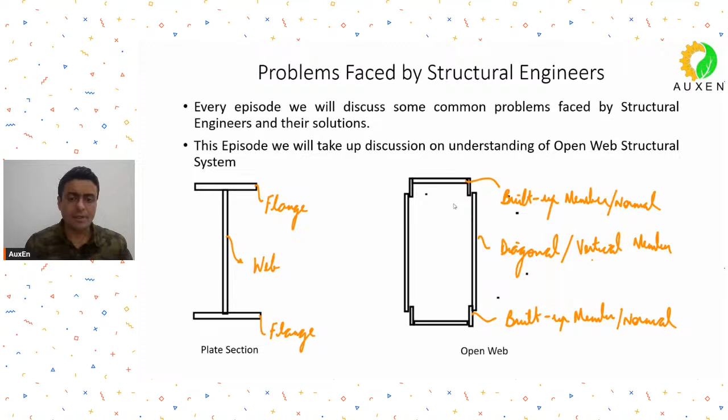Where have you seen this type of system? As I was telling you, in open web there is no well-defined web. So for example, in normal flexural plate sections, the flexural stresses are taken by the flanges and shear stresses are taken by the webs. But in open web, because there is no web, all the flexural stresses are taken by the top and bottom members in the form of a tension-compression couple, and the shear stresses are taken in the form of axial compression-tension by the diagonals or vertical members that we provide.

So we have shown a 3D isometric view of an open web member. It's nothing but a truss-like system. Generally for roofing systems we call it a truss, roof truss, but this type of arrangement we generally call the open web. It is similar to a truss kind of system.

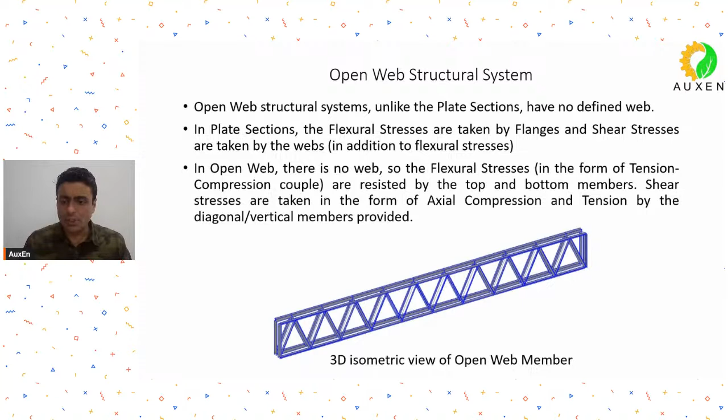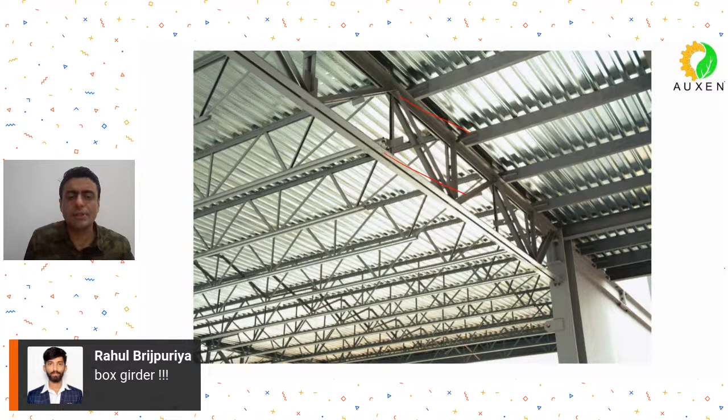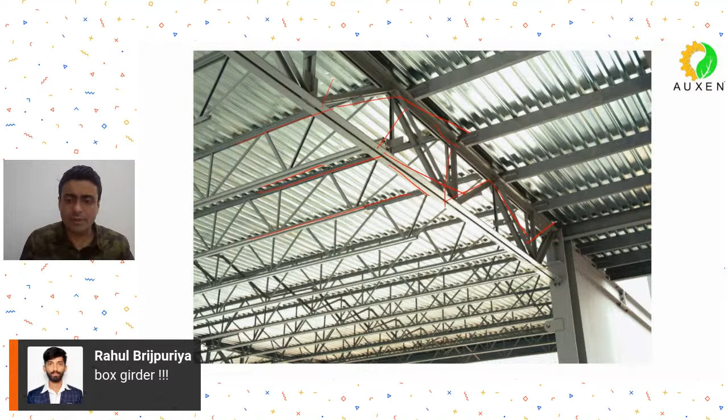This is more like a steel beam, an open joist - technically people like to call it an open joist. Again, this is similar to a truss system. You can see the diagonals, verticals, and the top and bottom chord. In the other direction also, you find all these are open web steel joists. It's a very efficient system, and if used properly it can lead to a lot of cost saving and optimization. This is another open web flexural member made in cold form steel.

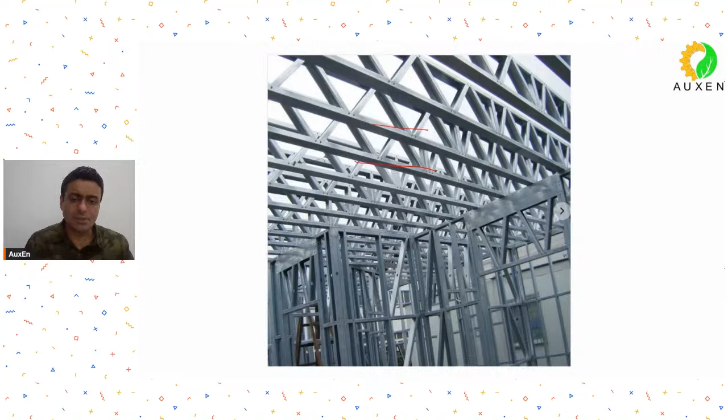I just thought we would put some examples before we begin. So what we are going to do is quickly see how the use of an open web system can prove to be cost efficient.

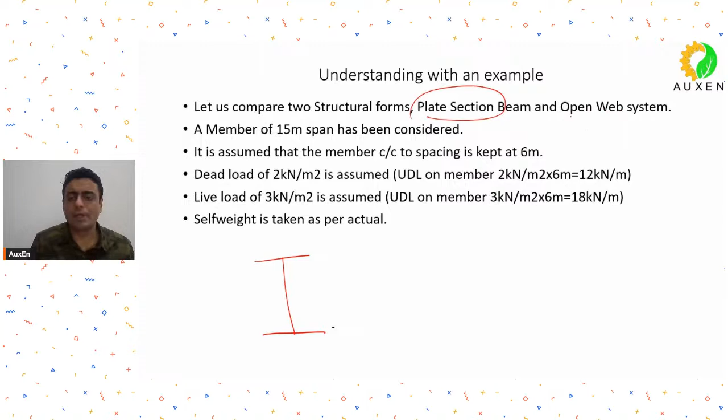So what we have taken - we have taken two structural forms, and we would try to compare them by some basic calculation. One we have taken is the plate section beam, comprising a flange and web. So this will be our plate section beam. And for open web, we have taken an assembly similar to a steel joist like this. So these two systems we are going to compare.

For comparison, we have taken a 15-meter span, and assumed parallel members - parallel beams, or parallel open web systems, at every 6 meters. Dead load, let's say some kind of flooring system - an area load of 2 kilonewton per meter square has been assumed. It has been converted into UDL, applied as 12 kilonewton per meter. Why 6 meters? Because 6 meter was the center to center spacing.

Then we have taken a live load of 3 kilonewton per meter square, and converting it into UDL, we have applied 18 kilonewtons per meter UDL. Self-weight is taken as per actual. So this is the problem statement. Then these are the two.

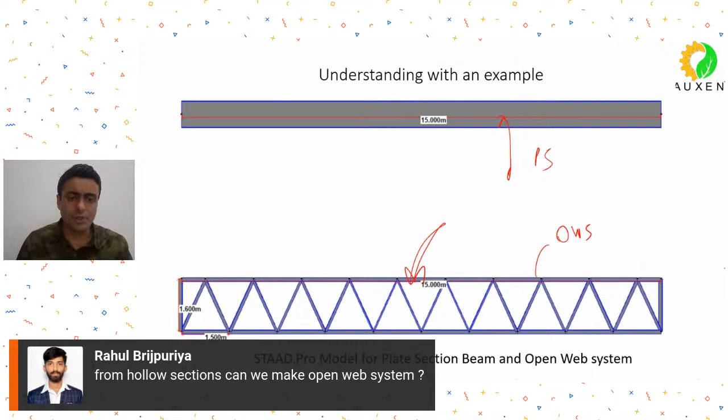This is the model that we have prepared in STAAD.Pro - this is for the plate section, this is for the open web system. Can we make open web systems out of hollow sections? Yes, you can. Actually I'll tell you later in this presentation that it is actually much more efficient to make an open web system out of hollow sections. So this is the problem statement.

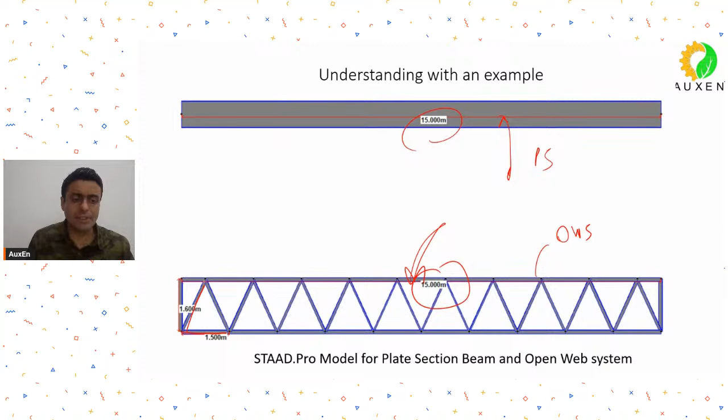We have applied equal UDLs on both these members. Both these members are of 15-meter span. You will observe that here we have provided these diagonals at every 1.5 meters - this is 1.5, this is 1.5. This height is 1.6 meters. So for a 15-meter span, we have kept the height as 1.6 meters - around L by 10.

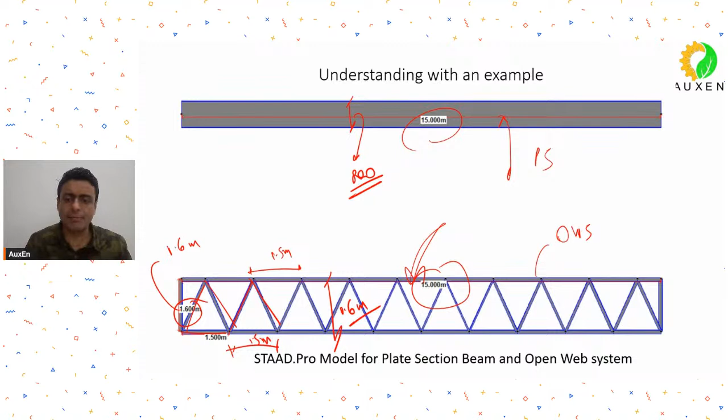This plate section that you see right now has an 800 mm web. So what you will immediately observe is that the depth of the open web is almost twice as much as the plate section depth, alright. So this is the first structural system, that was the plate section.

So the section that we have considered is a flange 300 cross 16 rectangular plate section - three plate section - and this web is 800 cross 8, with a bottom flange of 300 cross 16. We have used 350 grade steel.

So we found that the utilization ratio is 0.898, which is less than 1, acceptable to us for the limit state of collapse. For the limit state of serviceability, we checked the deflection value - it came out to be 51.48 mm. This is just slightly exceeding the permissible L by 300 limit for brittle cladding, so we are saying it's okay. So this member for a 15-meter span, for the given load, satisfies the conditions. Remember, we have taken just a simply supported span, just for the comparison purpose.

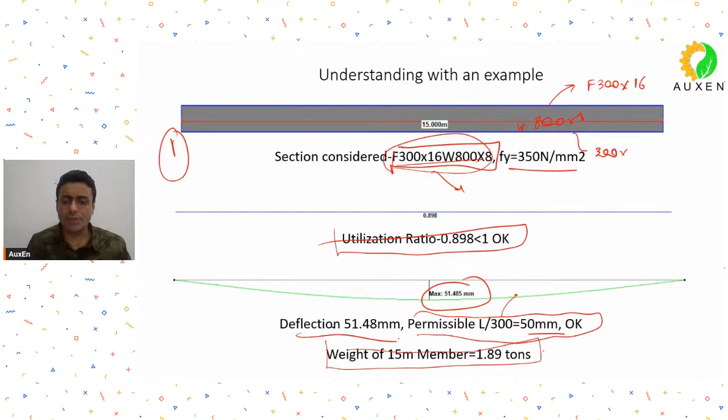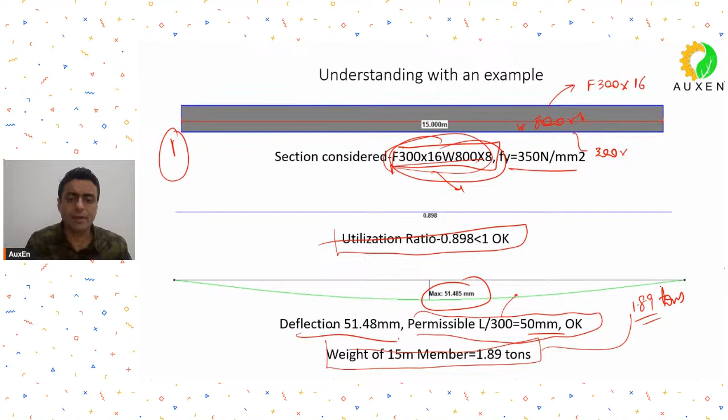So this is okay, and the weight of this 15-meter member, comprising of this particular section, comes out to be 1.89 tons, or 1890 kgs.

Then we have taken another system, the second system is the open web system. The same 15-meter span, applied with the same loadings but a different geometry. And these are the members considered.

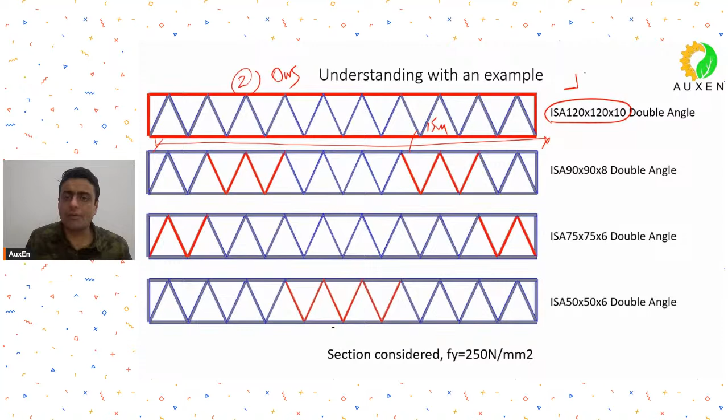In this case, I have made this open web system out of angles, hot rolled ISA angles. So this is a double angle that we have used, 120 cross 10. I have also highlighted the members which have been provided this section property - the top chord, bottom chord, and the members at the start and ending.

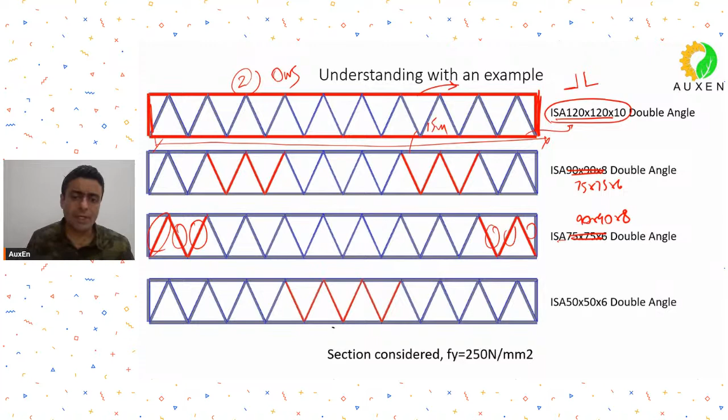Then these diagonals, the first four diagonals have been provided with - I think this is some typing mistake. This is 90, 90, 8, just make this note, and this is 75, 75, 6. The image has been interchanged. The diagonals near the supports are of higher cross section, 90, 90, 8. The diagonals next to it are 75, 75, 6. Make this correction. And the innermost diagonals are 50, 50, 6.

Why do we require lesser diagonal sizes at the center, and why is more diagonal size required at the supports and at the ending and starting support? What is the reason for that? Why do we require heavier diagonals at the start and end and lighter diagonals at the mid?

Because of the shear distribution that you get. Imagine this to be a simple beam. The more shear you get at the start and end, therefore the diagonal forces also are more at start and end, therefore you require higher section sizes. So we have tried to play with the sizes in such a way to achieve economy.

And what is the grade of material used? 250 grade, because it is hot rolled sections.

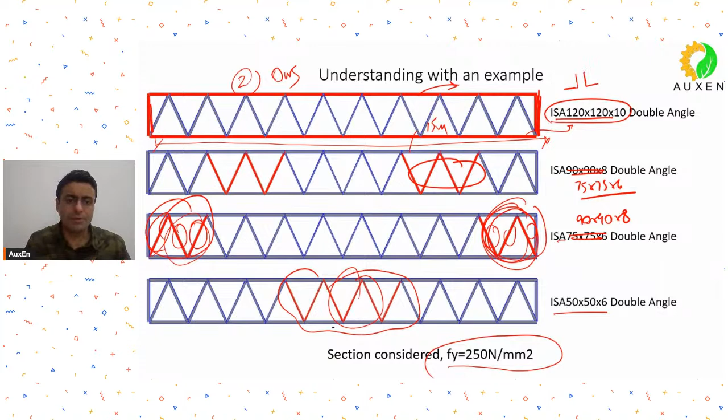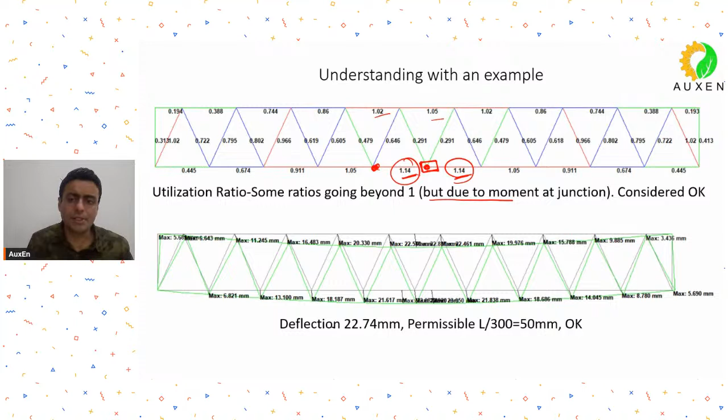So this is done. Deflection is well within the limit, 22.74 mm. Permissible was 50 mm, so deflection is quite within the limits.

Why did we have such an easy check, why was our deflection satisfied so easily? Because of the large depth that we have provided. Remember, we have provided a 1.6 meter depth. So deflection is easily satisfied. Utilization ratio is okay.

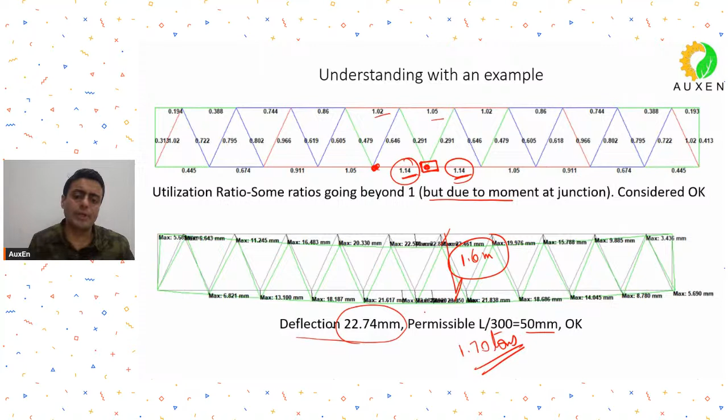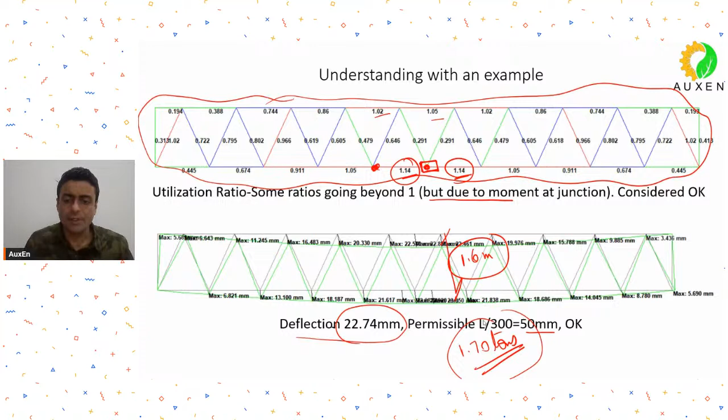And what is the weight of this member? The weight of this member comes out to around 1.70 tons. When I say weight of this member, I'm talking about this entire 15-meter assembly. This entire weight comes out to be around 1.70 tons. What was the weight of the plate section that we were having? I think the plate section was weighing some 1.89 tons. Okay, so this is what we have achieved.

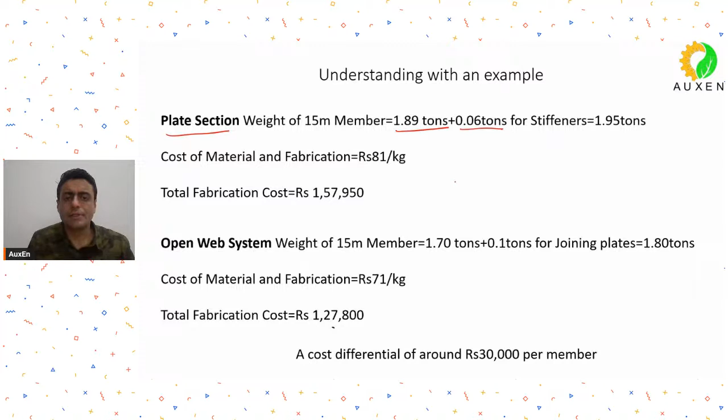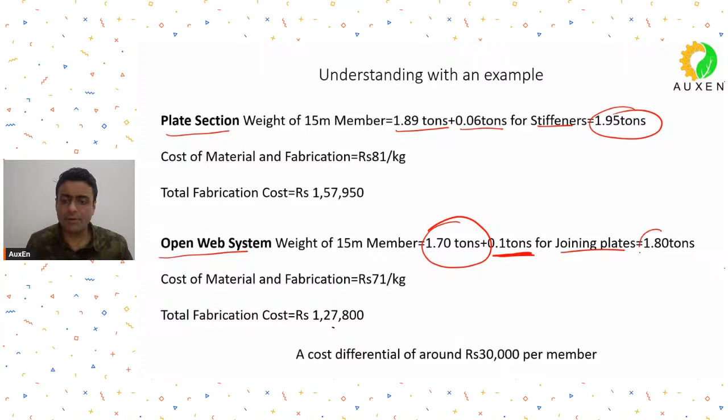Making a quick comparison, the plate section, as I told you, was 1.89 tons, adding another 60 kgs for stiffeners, so the entire assembly weighs around 1.95 tons. The open web system was weighing 1.7 tons, adding 100 kgs for joining plates and other joineries, we are saying this is going to be 1.80 tons. But remember, this was made out of 350 grade plates, and this entire system was made out of mild steel hot rolled sections, so the costing of these materials is different.

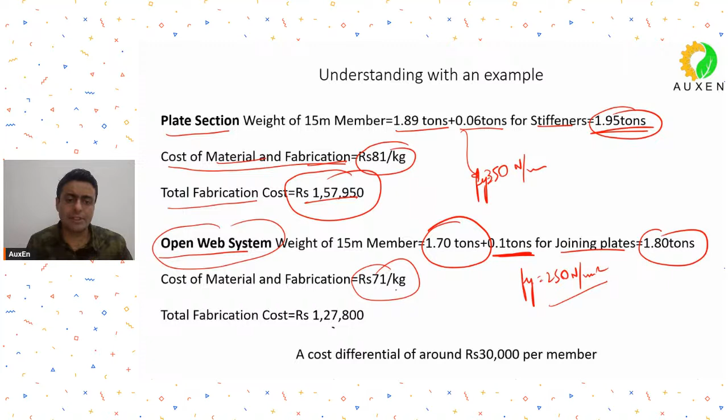So the cost of material and fabrication is rupees 81 per kg. This is a general cost in the Indore region, I would say, fabrication cost. This is material plus fabrication cost, it does not involve erection or assembly. And the total fabrication cost therefore comes out to be, for a 15-meter member, you multiply it by this tonnage, it comes out to be around 1,57,950. While for the open web system, because it was made out of 250 grade, the input is lesser at 71 rupees per kg. This again includes cost of material and fabrication.

So the total fabrication cost you get is around 1,27,800. So roughly, the cost differential comes around rupees 30,000 per 15-meter assembly. So between open web and plate section, the open web is costing you around 30,000 rupees less.

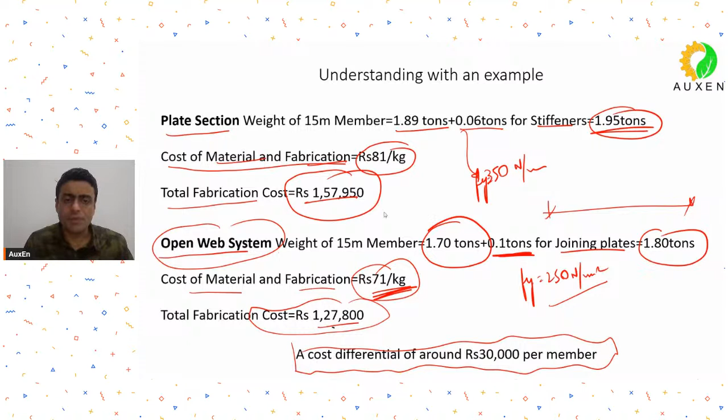This may not seem to be a very big difference, but imagine if there are several such members repeated in your structure. For example, if this was a rafter for a warehouse, you may have 20 such rafters. So it directly leads to a 6 lakh rupees saving straight away.

What is important to understand is that if depth is not an issue, or if you have no height restriction, then open web systems are extremely good and efficient structural systems.

Generally why we do not use open web is because we need to give more depth in order to control the sizes. So if you have height restriction, or some issue with respect to depth, you may not be able to use open webs.

But otherwise, if you do not have any height restriction, let's say if you are making a warehouse, it's okay to have a 1.6 meter depth open web assembly instead of a 0.8 meter plate section. It will not matter much.

And what Mr. Rahul was asking in the starting, if these open web systems are made out of hollow sections, then the performance becomes even better. Open web systems made out of hollow sections give you excellent economy and cost optimization.

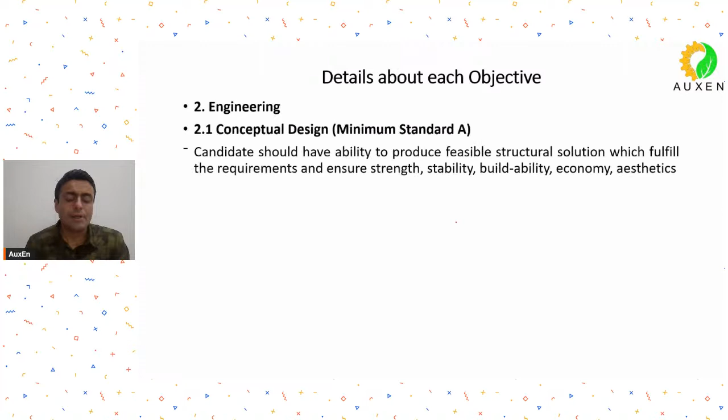They have put this requirement at the highest standard of competency. Then comes the core engineering, conceptual design. The candidate should be completely able, or should have the highest standard, in preparing feasible structural solutions. He or she should be able to come up with conceptual designs for a given design brief, and the conceptual design should ensure strength, stability, ability to be executed, good economy, aesthetics, etc.

The second core objective in engineering is the ability to analyze and design. This again, the minimum required standard is A, the highest standard. That means the candidate should have an ability to carry out analysis and design for the relevant codes as per the relevant standards.

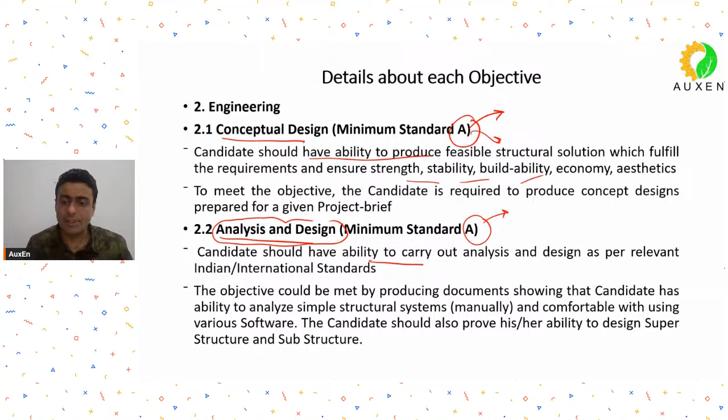The next objective in engineering is materials. The candidate should have good knowledge of material, at least two materials working knowledge. They have outlined four materials: concrete, steel, masonry, and timber. So at least two should be well understood by the candidate. This again is at the highest standard, A. That means the candidate has a complete ability and a good competency level.

The general societal aspects - how structures or built environment affect the society, how they affect the environment, how they affect the governance aspect. So generally these are called the ESG standards: environment, social, and governance. For this, you should have a minimum K level of competency. K stands for knowledge, so you should have a basic knowledge.

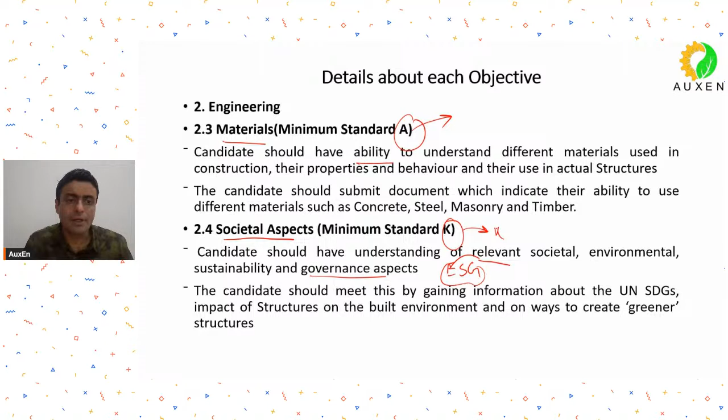Then construction - the competency required is an E. E stands for experience. So you should have some experience working on site, working with different materials. You should have experience about material testing, construction program scheduling, etc. So these were the engineering aspects. Overall, there were five engineering objectives required to be fulfilled by a candidate.

Then we come, very quickly, to the management and commercial aspects. So management skills, E, that means basic experience. You should have some experience leading teams in your organization, or some project management skills to do liaising work with the involved agencies. So the level of competency is an E, that means basic experience.

You should have some minimum understanding of law. This is at the lowest level of G. G means just a general appreciation, just a general know-how.

Health and safety - very important if you are a site person, because health and safety legislations are very important these days. So you should have some knowledge. The competency asked is a basic knowledge of health and safety issues.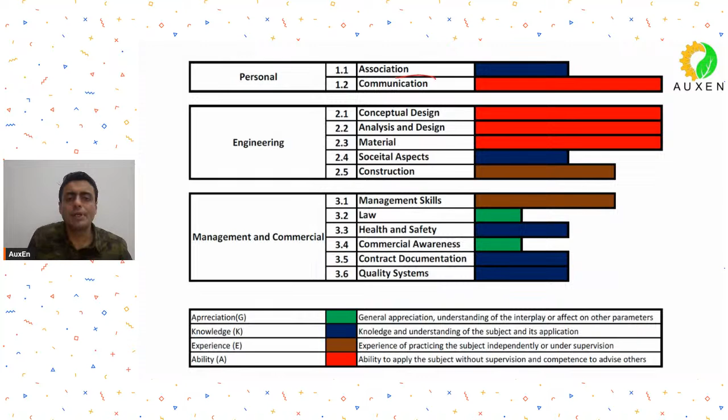So these are the competency levels. I have just tried to highlight it in a tabular form. So you will see those highlighted in red are the competencies most important for this certification. The brown are the second grade competencies, blue are the third grade, and the fourth is just a superficial appreciation. So these are the various competencies, the various objectives that you need to fulfill if you have to apply for this certification program.

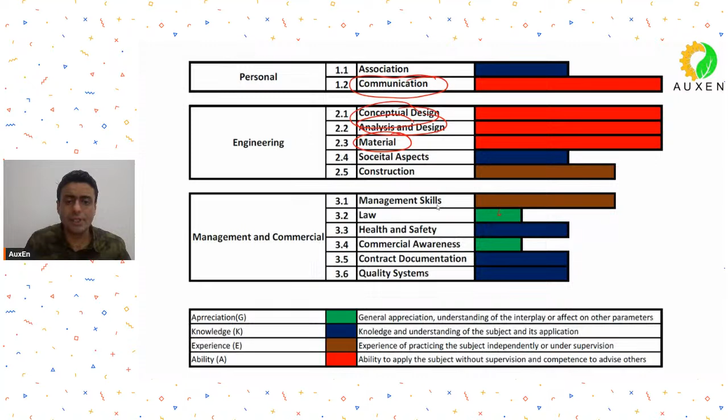So, as I mentioned before also, these objectives are chosen in a way to ensure that a structural engineer applying for this certification program is a well-rounded engineer. We don't want, or the IStructE does not want, engineers who are only good at design but have no knowledge of managerial aspects, or a structural engineer who only understands managerial aspects but does not understand the design.

So the aim is to have a well-rounded engineer who understands all these things. Now there are two ways to have this initial professional development criteria fulfilled.

One way is the individually managed method. This means that for young engineers who may not have the required experience, they may have to satisfy these core objectives under supervision of a mentor. For example, if you don't have sufficient knowledge of quality management systems because you have not worked in those fields, you approach a mentor to guide you. The mentor should be a structural engineer having relevant experience and expertise. After your mentor trains you, you fulfill the criteria and then apply. This is the individually managed way of fulfilling the professional development criteria.